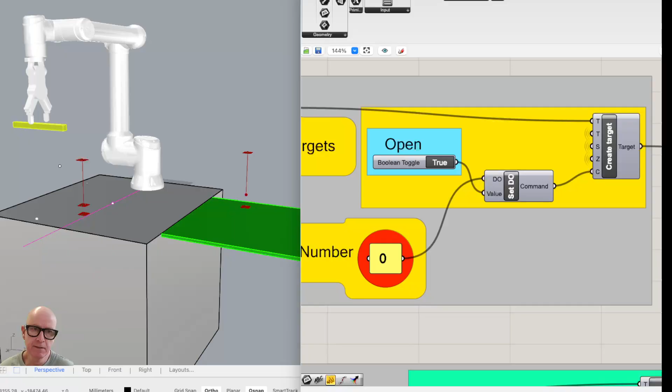Okay, so let's get to the heart of the matter here for our stacking sequence. The most important change from our 2D sequence is the opening and closing of the gripper. So, if you may recall, if you open up a create target component from our robot's software or plugin, it has a lot of options.

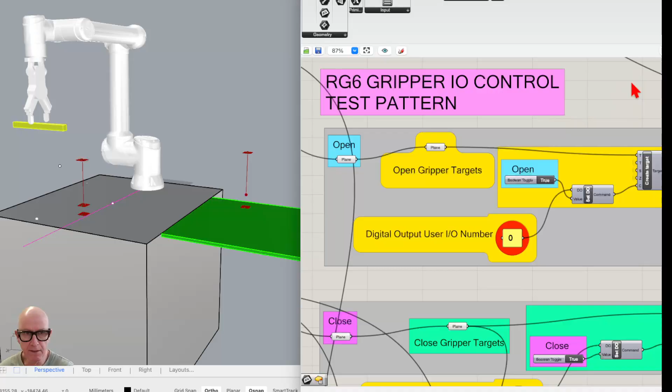If you right click on the component, these open up. And the one we want to add is the command input. So as soon as you see this little C shape symbol, that is a command option that we have for our targets. So this is our standard target. We have the target plane. We have the tool connected already, which is our gripper tool.

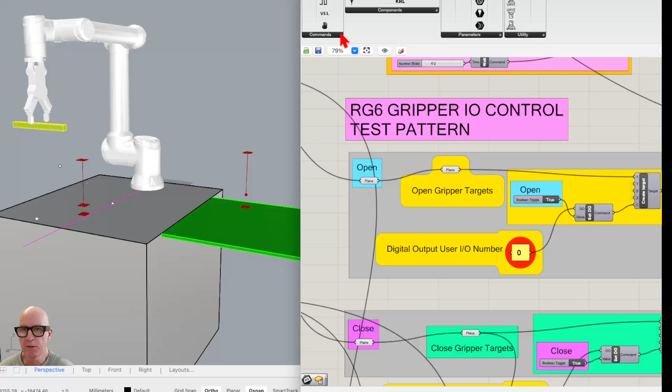Speed and zone, we've looked at that before. So really the only new thing is this command component. So the robot's software allows us to utilize some additional components. For example, you can wait for a signal or digital input from the robot. You can set a digital output, like send information back to the robot and so forth, okay? So the one we're using here is called set digital output.

So what does that mean? We talked about that in class. It means that we're going to trigger a 5-volt signal to come out of the robot controller or box. That 5-volt signal will be sent to the gripper controller, and it'll tell the gripper, hey, you need to either open or close. So how do we tell the gripper whether it needs to open or close?

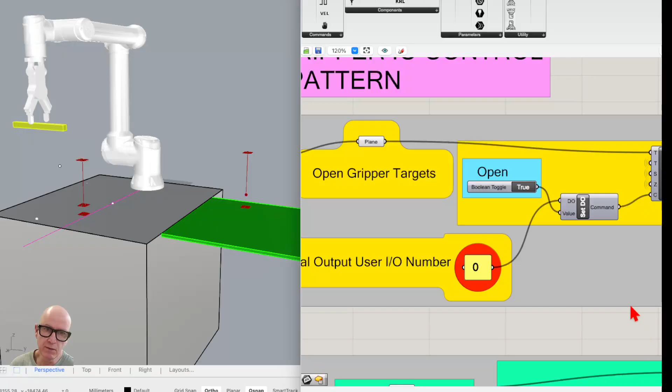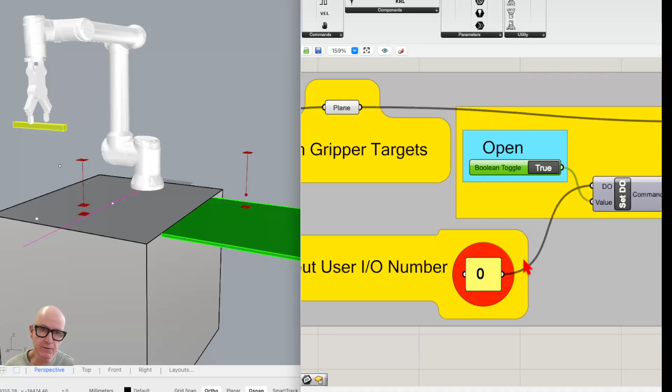Well, we're using two separate slots, slot 0 or slot 1. These are the slots, think of them as wires coming out of the controller on the robot and going into the control box on the gripper. So if you set a true and false toggle on slot 0, it's going to be set up in our control software for the gripper to either open or close. In this case, true equals open for our controller on the gripper.

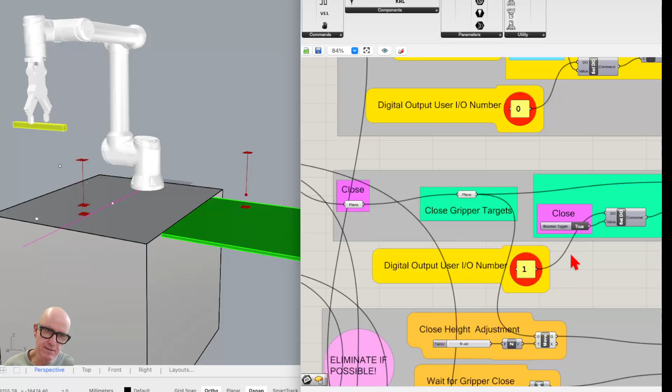In the same way, if we want the robot to close, we can have true equal to close on slot 1. So this is all very arbitrary. It depends on the way that the code is written on the gripper side. Okay, so we're not going to change these. You can test them out and flip them back and forth between true and false and watch the behavior of the gripper on the actual robot. We'll have a separate video on how the control software works for the gripper.

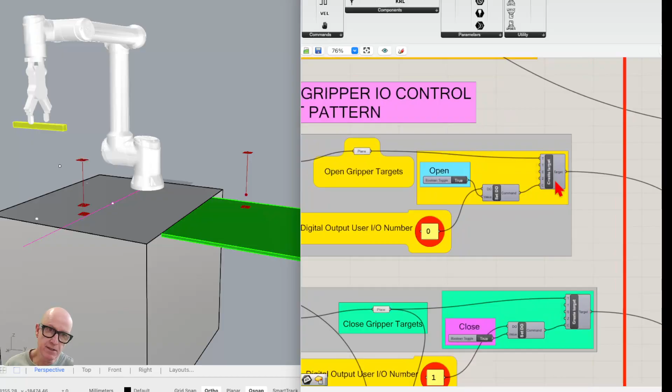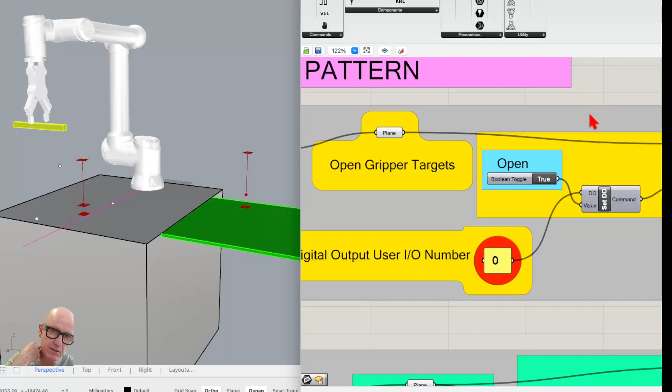But really, what we need to just understand is that these targets are very similar to the pick up and drop off targets that we had in our paint sequence. The only thing that we've added are these control or command sequences and our set digital output, which triggers an event on the robot output, either slot 0 or slot 1, to open and close the gripper. That's really the only new thing that we've added.

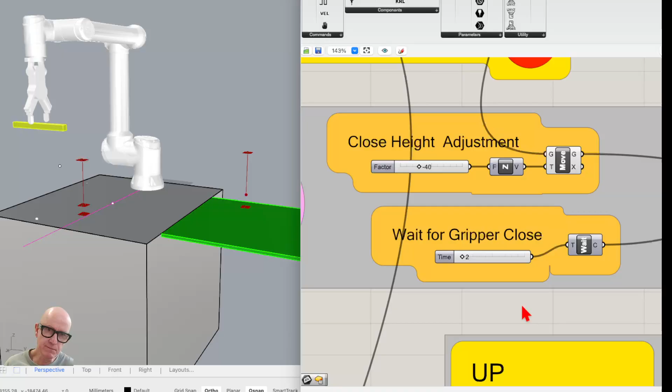Other than that, I've got a lot of height adjustments set up for being able to fine tune where the gripper opens and closes. And you'll also find these little wait for gripper close. These are kind of like delays so that you have a little bit of time to adjust the stick or pause the robot if necessary. And that's pretty much it.

We have a series of these. They're set up in a sequence so that we can move back and forth between the pickup cycle and the drop-off cycle. These are woven together, merged in this case, much like our paint cycle. And then they're sent to our program, and if we have no errors, then we can continue to simulate. So very, very similar sequence to what we had before with painting.

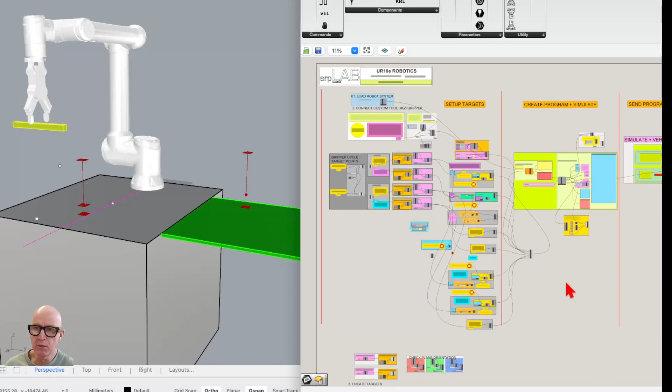The only really added complexity is your understanding of the correlation between whether or not the gripper is set to open or close or to trigger an event on our robot. So we'll go over what that means from the perspective of the gripper controller in a separate video.